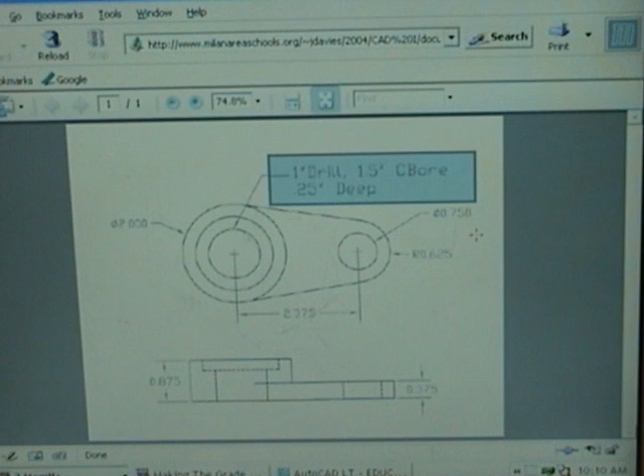So when we look at this piece, the biggest circle is a 2-inch diameter. What this area right there says is that it is a one inch drilled hole. That means the smallest hole is 1 inch. Then it says it's a 1.5 inch counter bore, and a counter bore is this piece down here. So that circle is a 1.5, and it's down 1/4 of an inch. So we will talk about that when we get to that point.

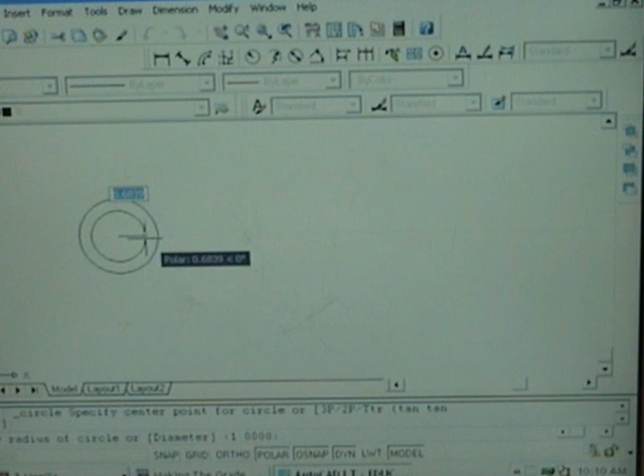I'm going to start off by drawing the top view. So we got a 2 inch, a 1 inch, and a 1.5 inch circle to draw. D enter, 2 enter. D enter, 1.5 enter. D enter, 1 enter. So I got those 3. From center point to center point it is 2 3/8. So I'm going to draw a line from my center point over 2 3/8.

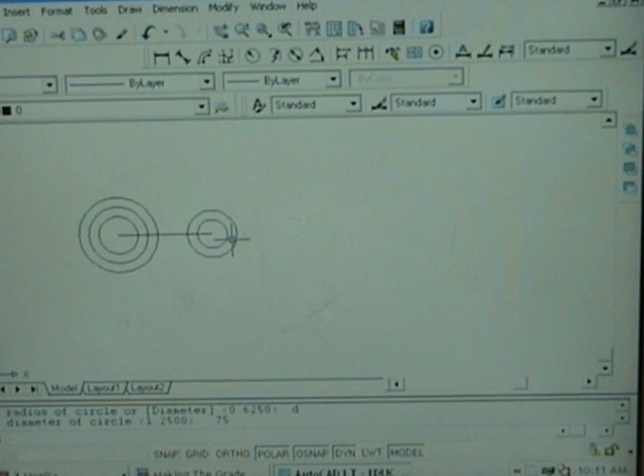I've got a 3/4 inch diameter and a 5/8 radius circle. So a 5/8 radius and a 3/4 inch diameter for those two circles. Now I need to connect the two. In order to connect the two, I'm going to right click on my O-snap at the bottom, go to my settings and make sure my quadrant and my tangent are on, and they are.

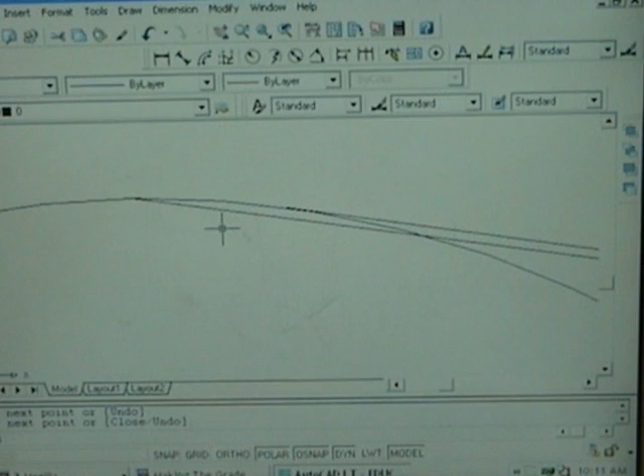I'm going to draw a line from my quadrant to my tangent, back to my tangent. What that's going to do is it's going to create this type of a line. I'm going to delete the inside one out of there now. Draw a line again from my quadrant to my tangent, back to my tangent. Zoom in on it, erase that inside one out. So the drawing itself, I got to trim out the inside circle here, and then we'll start on our front view. So I'm going to go modify trim. So my top view is now completed.

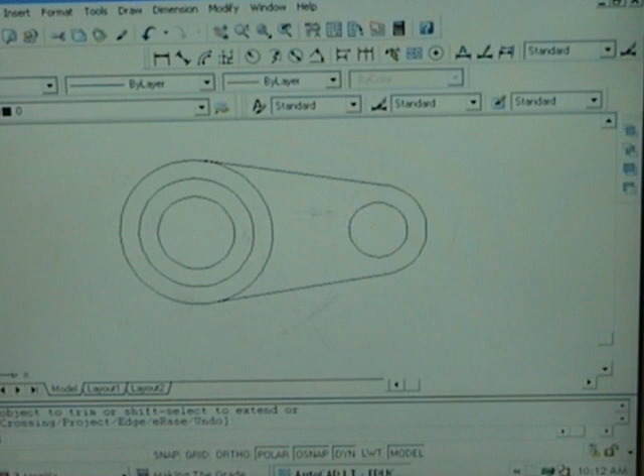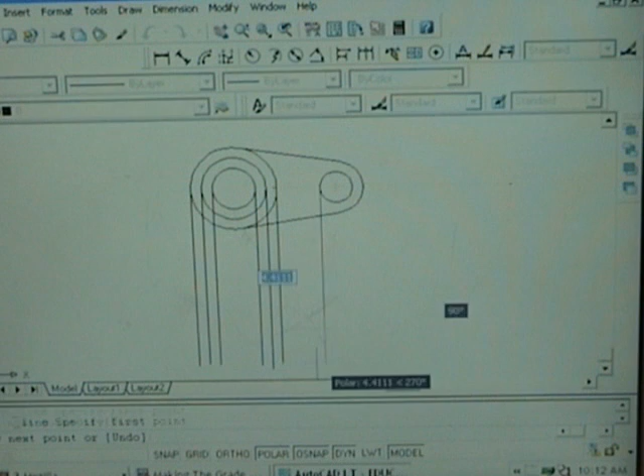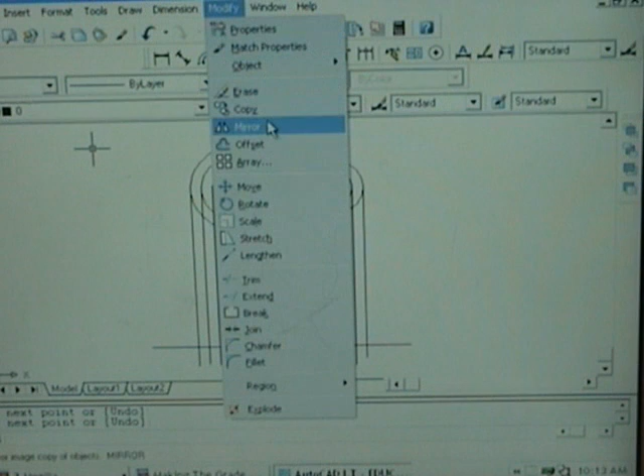In order to do my front view, I'm just going to start pulling down every quadrant here. Every feature gets pulled down. And then to start off that front view, I can just draw a line across. So that's going to be the bottom of my piece. Then when I look at it, it tells me it's 7/8 of an inch tall and it's 3/8 of an inch tall. So with that said, I will go modify offset, 7/8, and I'll repeat my offset at 3/8.

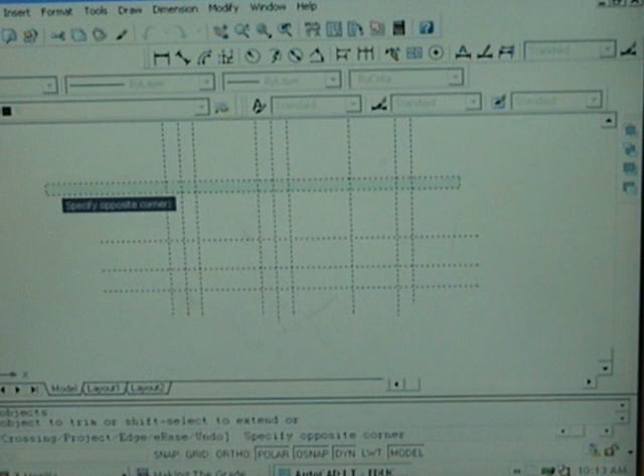There. Now we got a little bit of mass confusion looking down there. Just got to think about what you're seeing. I'm going to go modify trim first off. Let's get the overall shape of my piece. All right, we know that from this big quadrant of the circle down is going to be the outside of the circle, so I can actually erase those out of there. We're starting to get our shape of the piece. I could probably move this one over to there for now.

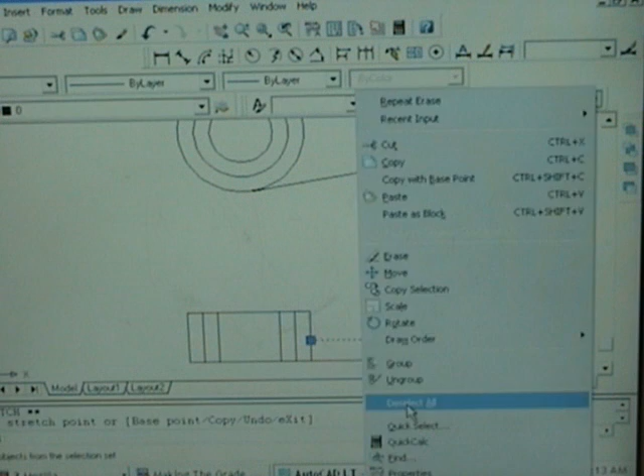So now we got to put our counterbore looking piece over there, and that counterbore looking piece is this piece right here. We know that the hole goes down 1/4 of an inch because of what it says right here on the blue. So it goes 1/4 of an inch down. So I'm going to offset this one down 1/4, and I already have all my other lines over there to be able to draw it. So I'm going to modify offset, down 1/4. And now I can start trimming. What do you see? You got to see the counterbore.

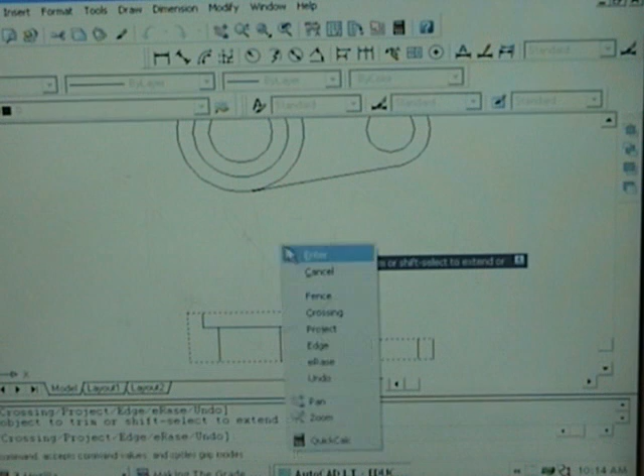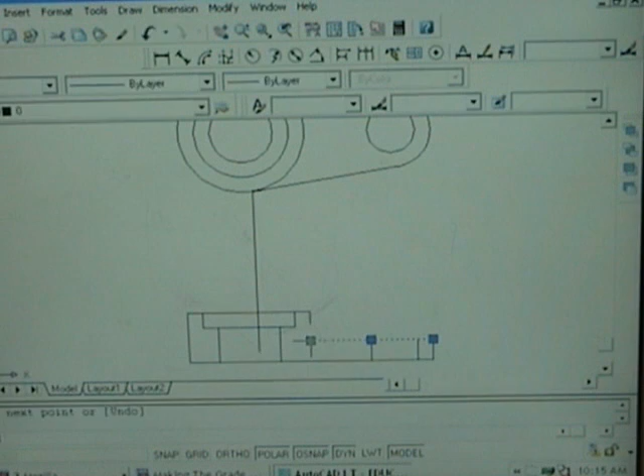There's one side of it. There's the other side of it. Now I got my counterbore and I've got my hidden lines there for the hole. The last thing I need is what I call the butt crack. This area right here is the butt crack. So how do I show that? I represent it by intersecting that point down. Really all I'm going to do is run this point over to it and then erasing that one back out. So that is my butt crack.

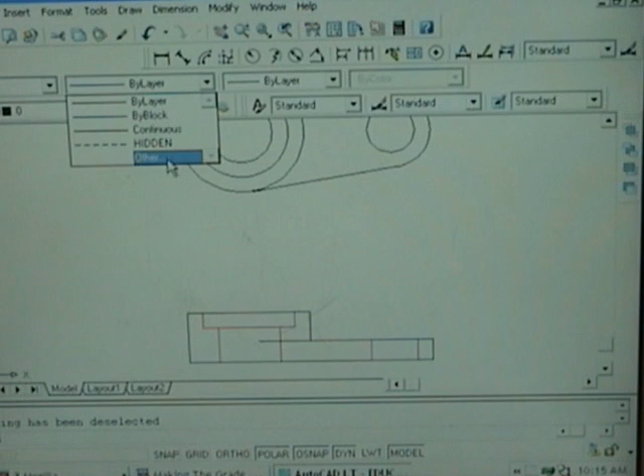I also got to highlight these two areas here, turn them to red because they are hidden lines. I do have a hidden line loaded already, but if I don't, I have to go to Other, Load, find the word hidden. Do not use anything up there. Find the word hidden, which is here. Choose one of the hidden ones. Doesn't make a difference which one. Select them again, and I will change them to a hidden line also. So they are now red and hidden.

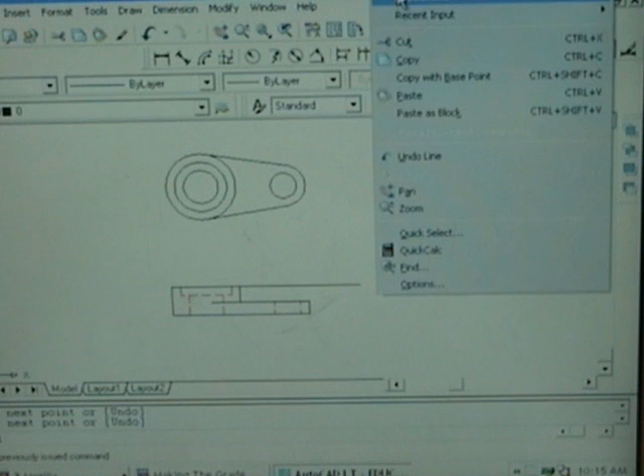So now we've got our top and our front view done, which is basically copying exactly what we did here. Now we got to get our right side view. In order to get that right side view, I want to go from the hypothetical upper right hand corner of the piece, which is there. Angle 45.

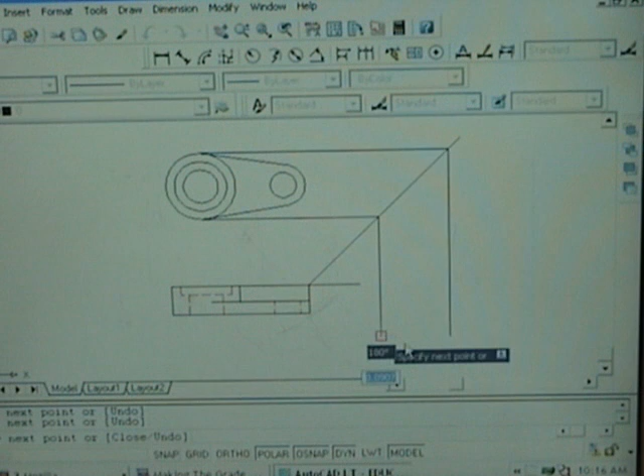And I'm going to transfer that top quadrant over and down. Bottom quadrant over and down. Top one over. Middle one over. And the bottom one over. Just transferring all the horizontal pieces. Right now I'm going to go modify trim. Got my overall size of my box on there.

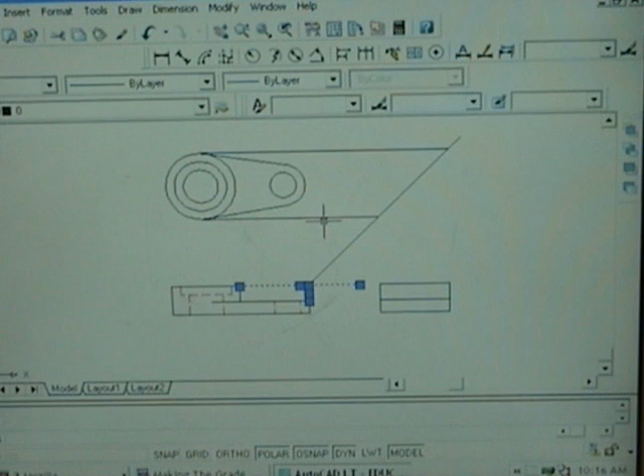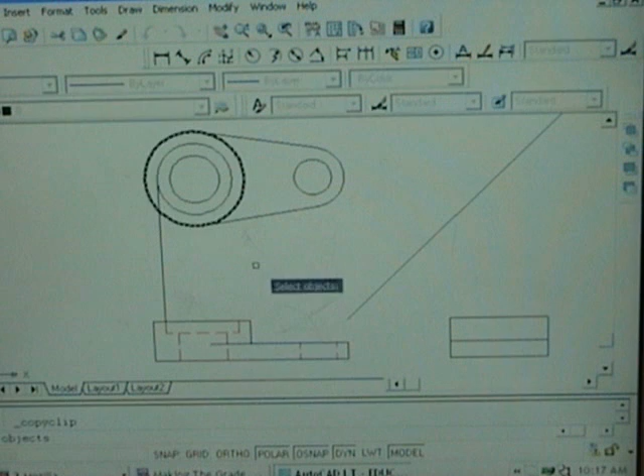Now the last thing I got to transfer over is my stuff for this counterbore. So what I really want to do is, I can zoom in a little bit, I'm going to copy this piece. That quadrant is where that piece starts at. Well, since this piece is rectangular, that quadrant is really this quadrant. So if I shoot that quadrant over and down, here's what I just did. That point is that point, is that point, is that point transferred around. So in other words, this point and this point are the exact same thing.

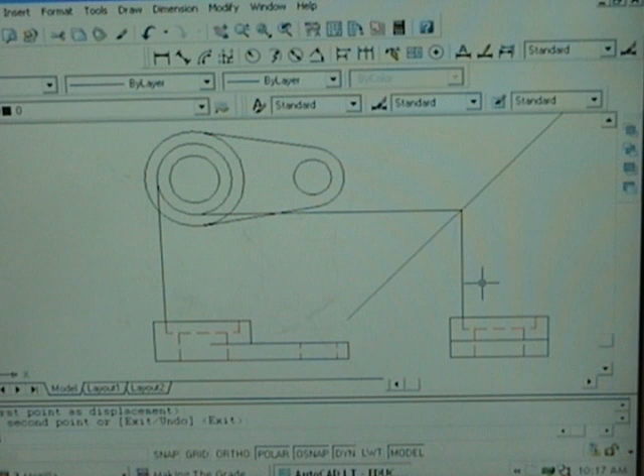So I can go modify copy. It says what do I want to copy? I'm going to select my entire counterbore. It says what else do I want to copy? There is nothing I want to copy, so I'm going to right click. My base point is the same point that we started with, that point there. Where do I want to go to? I want to go to this point. So I just copied that counterbore piece around, and now I can delete out these pieces.

One thing left to finish the drawing is the inside circle here. Over and down. That inside circle is going to be a hidden line. And also, if you look, this piece is only that tall. So nothing can be above this line. So I've got to modify trim. So they're going to be below that line.

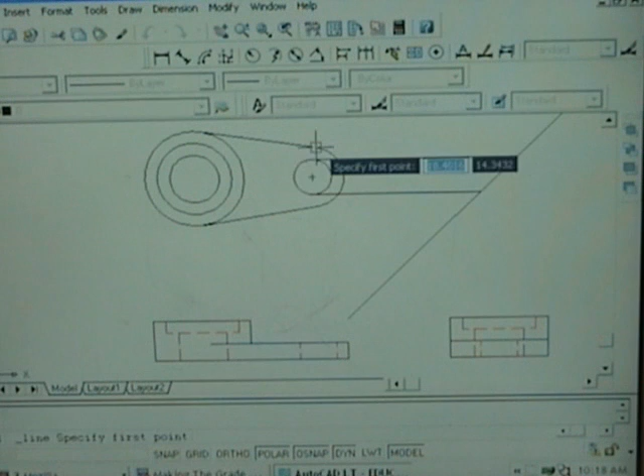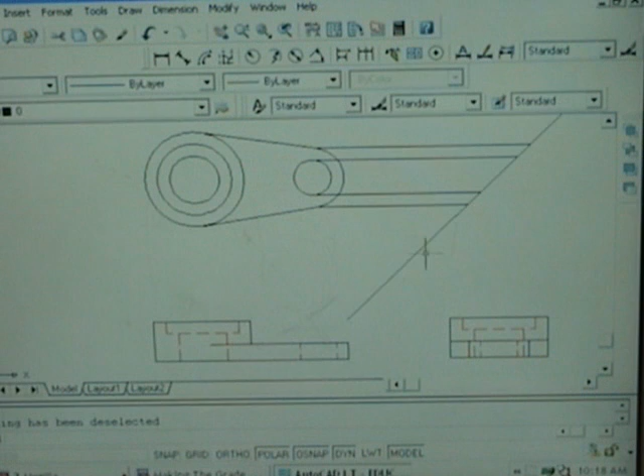And also, I do have to pull over this quadrant, over and down. And this quadrant over and down. Same thing, I can't have those lines any higher than what it actually is, 3/8 of an inch. So 7 out of the 10 points is now complete. We need to dimension the drawing.

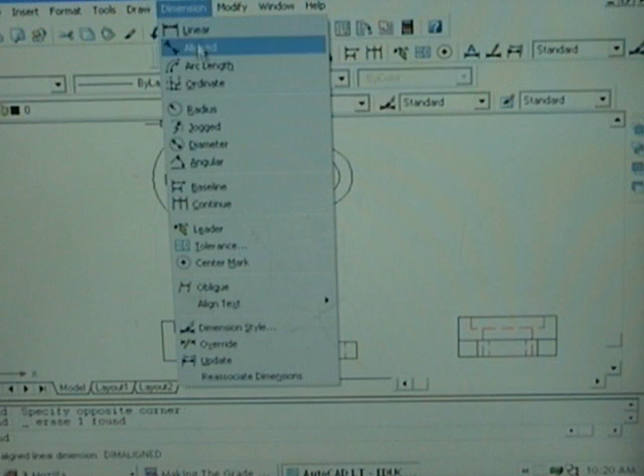Alright, to dimension this drawing, we've got to look at the piece, and again, if you just have all these dimensions that are on the original part on yours, you'll be good to go. I'm going to go dimension a diameter. Choosing this one over here out. I'm going to dimension the inside diameter. So there's my 2, my 1.5. Dimension this inside one there as well. So there's my 3 circles.

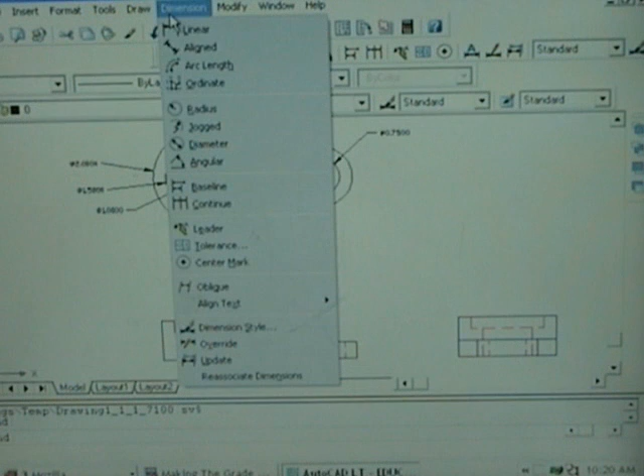I'm going to dimension the diameter of the inside circle here. And now to do this last arc, I cannot do a diameter. I have to do a dimension, a radius. Just like that one come out. So now I've got all my circles dimensioned. I dimension from center point to center point, pull it down.

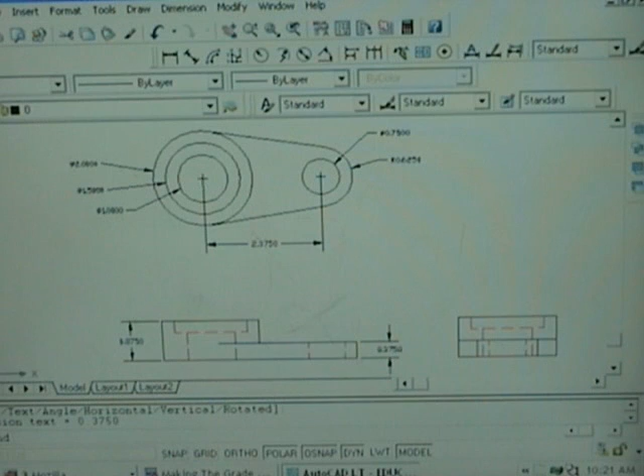The last thing I got to do is show how tall the piece is. In this particular example, there's not going to be an overall width measurement. There's just going to be the center point to center point and the circle diameters on there. The overall width of it is obviously a diameter too. So if I put one here, that'd be over dimensioning. That'd be 2 inches and all that stuff. So there's only actually one more dimension I need, and that's the 1/4 inch coming down. Now I'm going to grab that one and pull it up. That drawing, counterbore, is now complete.